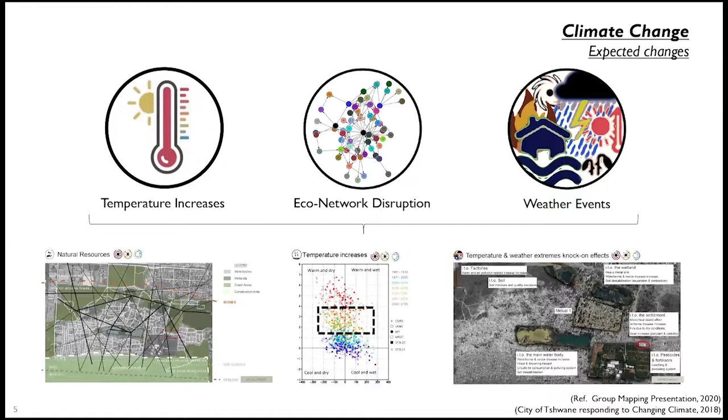Melusi is a rapidly expanding and developing peri-urban informal settlement located about 30 minutes west of Pretoria. We started by analyzing the climate changes expected in Tshwane and Melusi and found that an increase in temperature, weather events, and eco-network disruptions are the primary changes we can anticipate. These changes become vulnerabilities when combined with the current characteristics and vulnerabilities of Melusi, such as the construction methods used or the lack of formal services.

Based on these characteristics and expected changes, 6 climate risks were identified which I believe are particularly urgent to adapt to. Through our group mapping, we measured vulnerability using exposure, sensitivity, and adaptive capacity as indicators, of which I will be focusing on the latter two for this project.

Specifically, I hope to reduce sensitivity by investigating appropriate ways to moderate climate changes while seeing how these options can work together to optimize their impact. I also hope to increase adaptive capacity by investigating mindsets that encourage sustainable equilibrium as a means of becoming resilient, which is where I believe the real challenge lies.

In order to do this, we need to turn to nature for guidance. While investigating this concept, I encountered 3 incarnations of this kind of thinking. The first is bionics, which is copying nature in a mechanical way. The second is biomimicry, but many sources suggest that this is actually greenwash, as it relies on taking the technology of nature and appropriating it to our needs, regardless of the original context.

This brings me to ecomimicry, which refers to trying to understand the intrinsic logic of nature, specifically how and why nature organizes itself in certain ways, with the ultimate intention being to understand how we can adapt our systems using this logic. This is also the theoretical framework I used going forward.

Based on the literature I reviewed, I derived 7 principles that to me encapsulate ecomimicry's intentions and parameters. These underpin my design product and the design process, as this project to me was an investigation into how ecomimicry can be applied as a way of thinking when working towards climate adaptation.

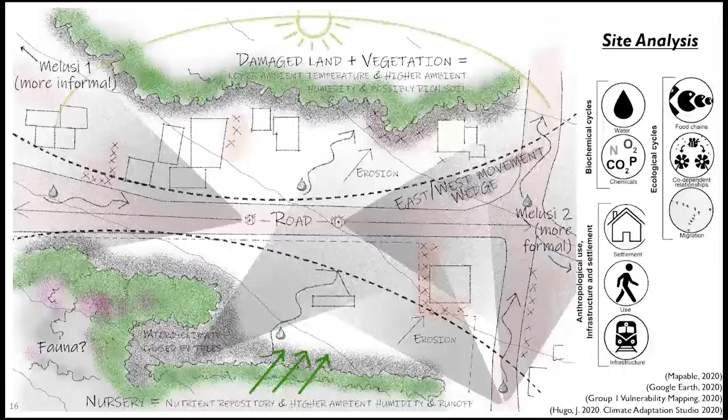The first step in identifying opportunities for this entailed understanding the site and brief. For the former, this included mapping environmental characteristics and cycles, the way people interact with the site, and how these factors affect each other. Similarly, the brief from the COPC was reviewed in order to understand what they and the community need this project to be, which led me to electing healing and knowledge management as my primary programs.

I also expand the clinic to include mental and emotional healing, and for knowledge management I note that it is indeed important to teach a person to fish, but it is also important that they have access to bait and tackle afterwards, otherwise their learning will be lost. Thus, both phases of learning need to be accommodated.

When these two fields intersect, one also unlocks the option of helping community members reach and continuously maintain healthy lifestyles, which is a key factor in reducing climate vulnerability. Similarly, both healing and knowledge management are crucial factors when trying to address the climate risks threatening Melusi.

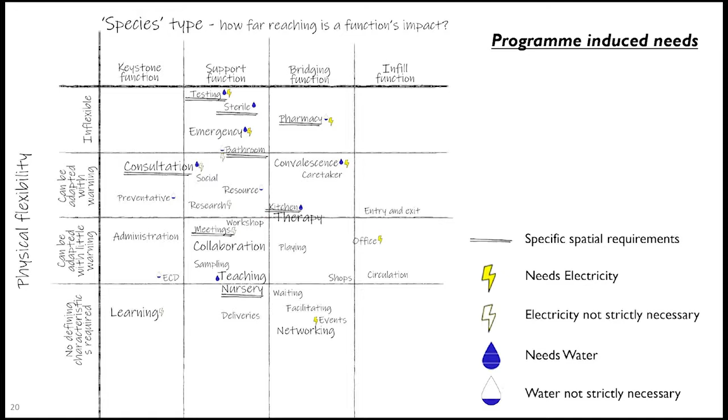Here we find our first opportunity for eco-mimicry. By considering the programmatic functions as components in an ecosystem, it enables us to identify the roles they play and what they need, contribute, or detract from the system in order for the whole to function coherently.

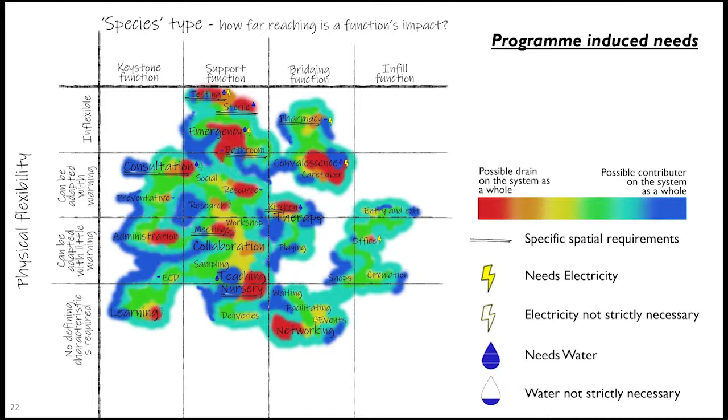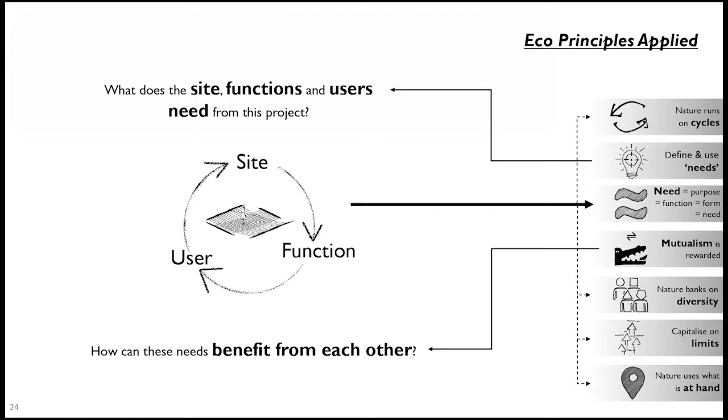But in order for this to manifest on site, they need to be overlaid with systems already present there. Thus, guided by the eco principles, I ask, what does the site, functions, and users need from this project, and how can these benefit from each other?

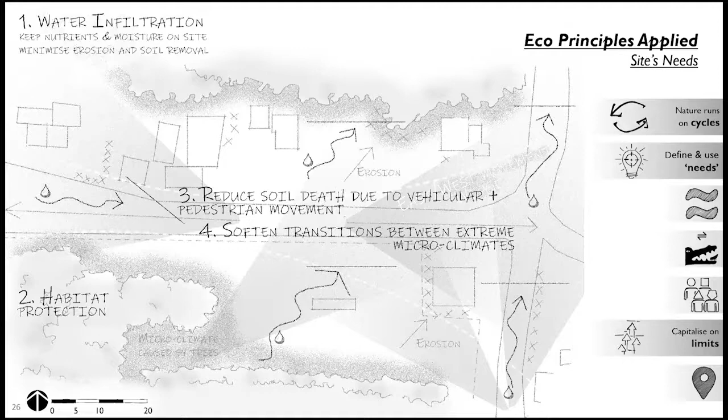We start off with the site characteristics that need to be responded to before identifying the core site needs, which rely on allowing ecological cycles to function uninhibitedly.

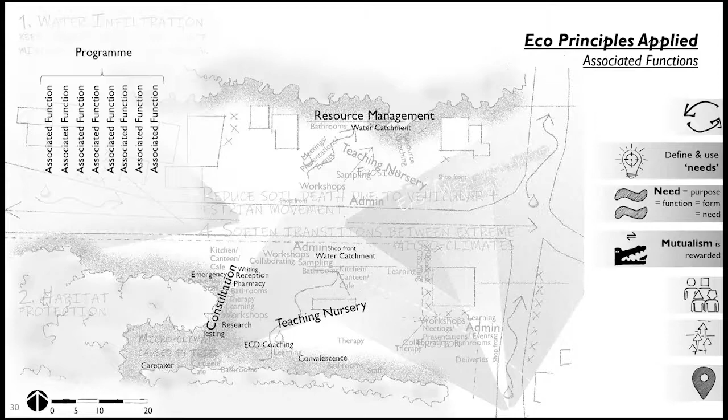But what could a function benefit from being on a specific spot on the site and vice versa? Some mutualisms are more advantageous or singular than others, and they in turn have knock-on implications on the rest of the system, which can be a result of shared needs, codependencies, or mutualisms in their own capacity.

In this context, an example would be the functions that require specific services. One is then left to contemplate functions that are flexible both spatially and relationally. As such, there are several options in terms of how the remainder of the site can be populated.

For the purpose of this project, I elected the indicated option as I feel it best addresses the current needs, risks, and opportunities, but this inherent flexibility was kept in mind for latter parts of the project in order to increase adaptive capacity.

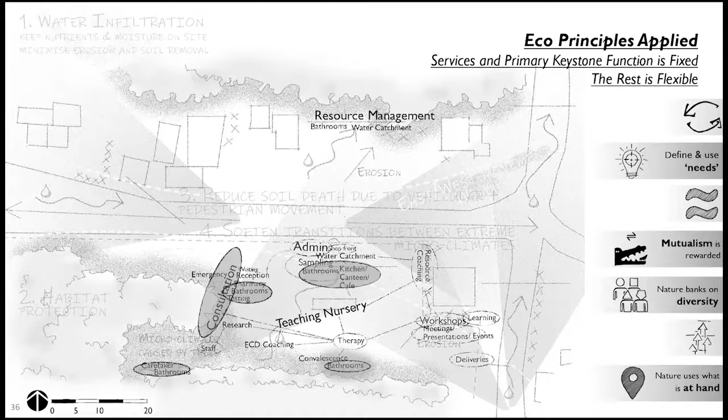Only the service clusters and the keystone function are fixed, with all other spaces being flexible. I propose to achieve this with modularity of materials and techniques.

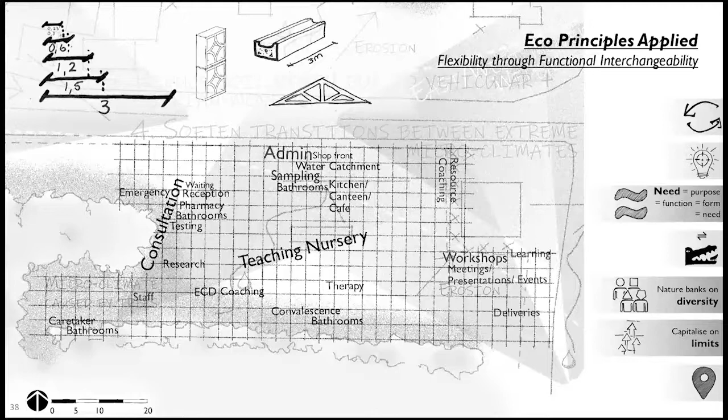The 3 by 3 meter grid was selected for its near universality as a module and its advantages in terms of solar exposure, which was also a key factor in electing north-facing massing. This also suited the site shape and edge condition.

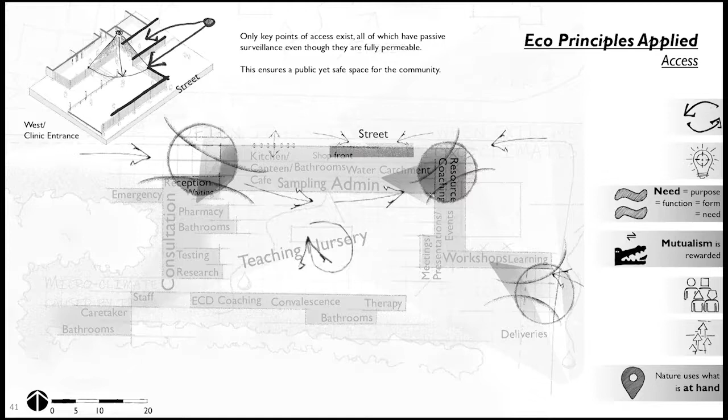Turning to the user's needs: firstly, this needs to be a safe yet public space for the community. Thus, passive access control was needed and achieved by nesting entrances between functions. These entrances also streamline movement so users can wander into the building and determine their own level of interaction.

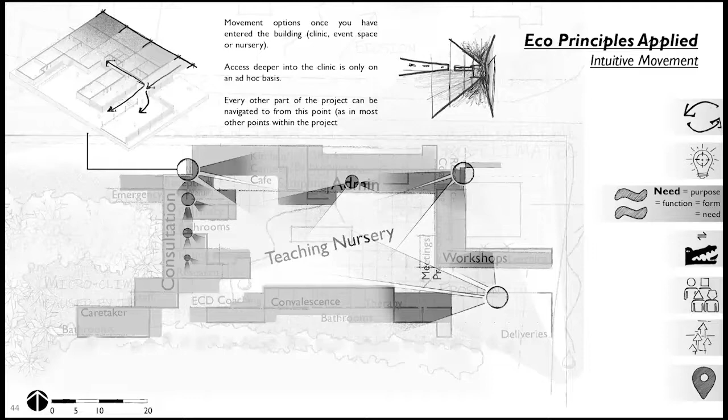Spaces need to conform to their legislative spatial requirements. Intuitive movement is another factor, and by using the courtyard typology, wayfinding complications are minimized since the major functions are consistently visible. Progress deeper into the buildings would only ever be on an ad hoc basis, increasing privacy as you progress. Thresholds soften the transition between outside and inside, or help define different levels of privacy.

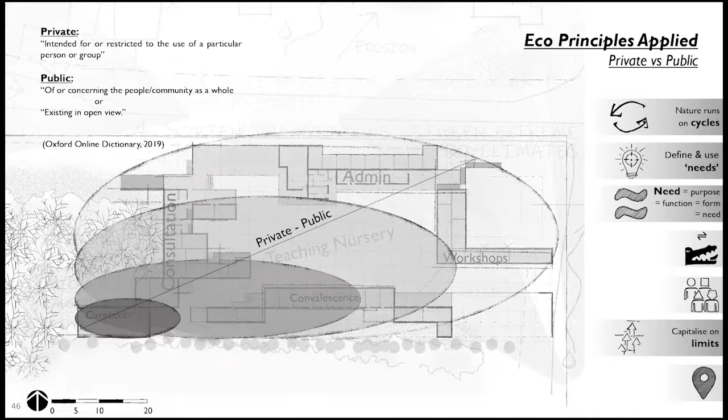This brings me to a duality I found particularly interesting and important: the contrast between private and privacy, or public and exposure. This hub is intended as a public community space, but it contains zones that inherently require privacy and an impression of safety. Both needs must be kept in balance.

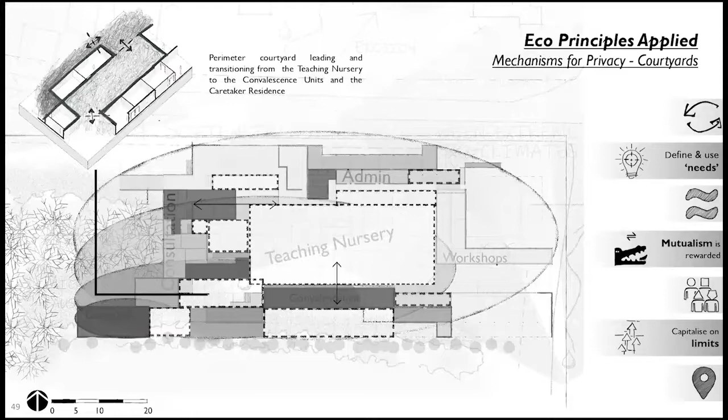I attempted to balance this by having the main and perimeter courtyards define transitional and privacy hierarchies. This is reinforced by thresholds, materials, and level differences, informed by site needs outlined earlier. Minimizing soil death and being ecologically permeable were two needs I addressed.

I addressed this by raising the building off the ground and using pin foundation systems. This is also advantageous as the site has a slope that would have required cut and fill otherwise. It also provided an interesting space-making tool and visual language for the project.

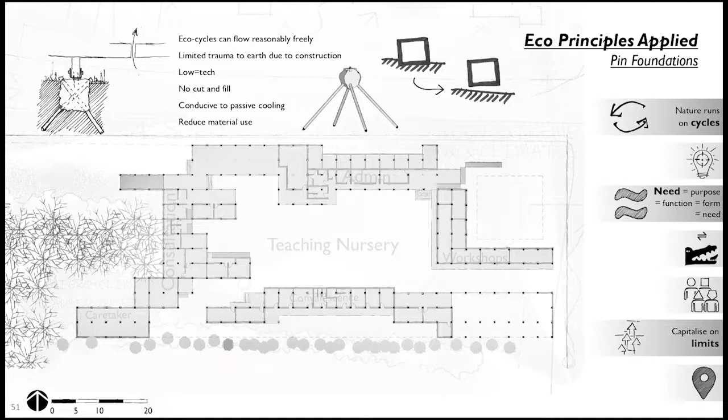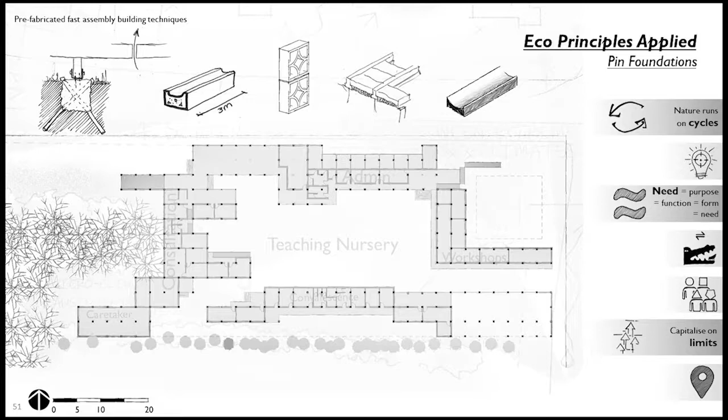I also endeavored to use techniques and materials that were mostly prefabricated while also being low-tech and standardized, in an attempt to future-proof the project. The last consideration was to minimize dependency on formal service provision, achieved by making the building largely passive and limiting required services as much as possible.

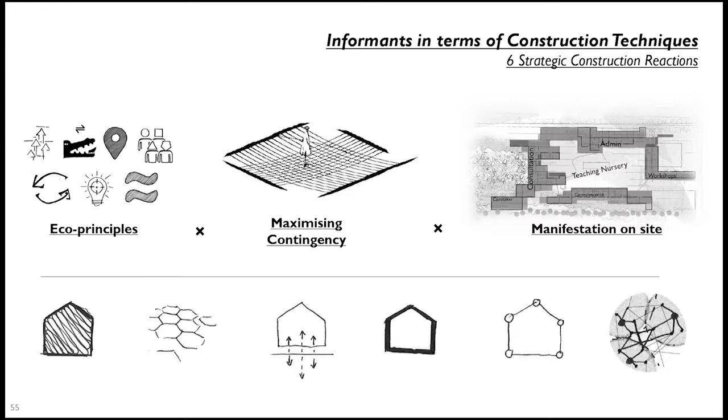Collectively, all of these considerations manifested in the building shown. I believe the considerations and resultant building can be summarized in 6 strategic reactions, all of which increase contingency through the principles of eco-mimicry and thus increase resilience. I'll illustrate how these reactions come together spatially with 3 example zones.

First is the consultation area. Nowhere else is a public-privacy duality as striking, and one can see how breeze blocks, level differences, windows, and thresholds act to ensure privacy while not alienating possible visitors.

These devices have a dual function in increasing the passive performance of the building, securing the perimeter, creating niche microclimates, or defining a visual language for the project, making it an ideal example of a high contingency system—multiple factors contribute to the same goal, but all factors also have multiple goals, making the network as a whole more resilient.

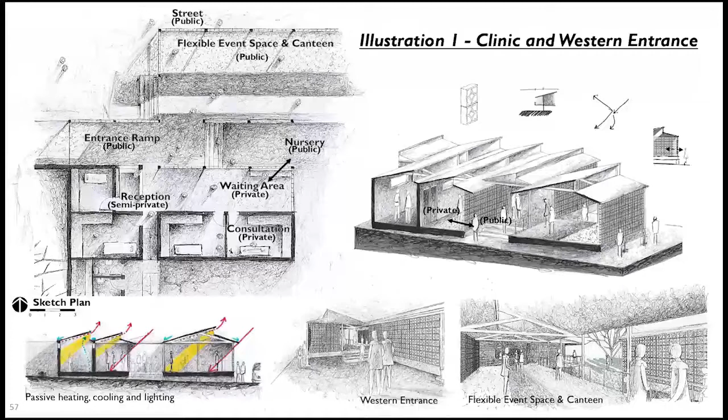Second is the administration block. Here one can see the public street edge being used to house shops or workshops, which act as an extension of the learning taking place inside.

While on the external walkway, most of the site is visible, and the threshold between inside and outside can clearly be experienced here. Modularity and flexibility are also evident in this zone.

As noted previously, I elected this functional layout as I felt it best catered for current needs. However, if these needs change, the spaces provided are versatile enough to be adapted without changing anything structurally. If structural expansion was required, the modularity and low-tech construction would make this viable as well.

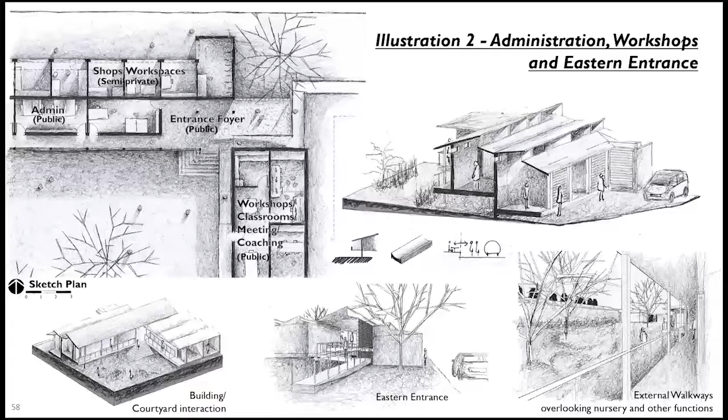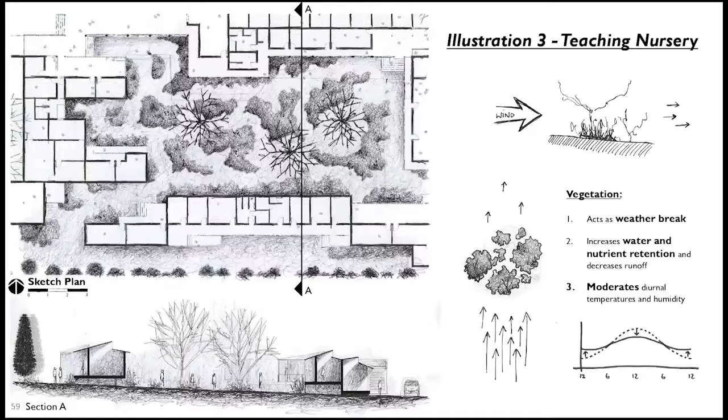Thirdly is the teaching nursery, which contains a variety of microclimates conducive to different uses and plant life. In addition to its functional role, the nursery fulfills several eco-roles such as increasing water and nutrient retention, biological diversity, microhabitats, acting as weather breaks, and moderating temperature and humidity.

I do not intend for the nursery to be a space for urban agriculture, as that's not reasonable to expect from a nursery of this size. Rather, the worth of the nursery lies in teaching the community about the environment and about caring for plants.

Secondly, I feel there is great value in allowing people to interact with and possibly form attachment to the environment through something like this nursery, as I feel this is a vital step towards true resilience.

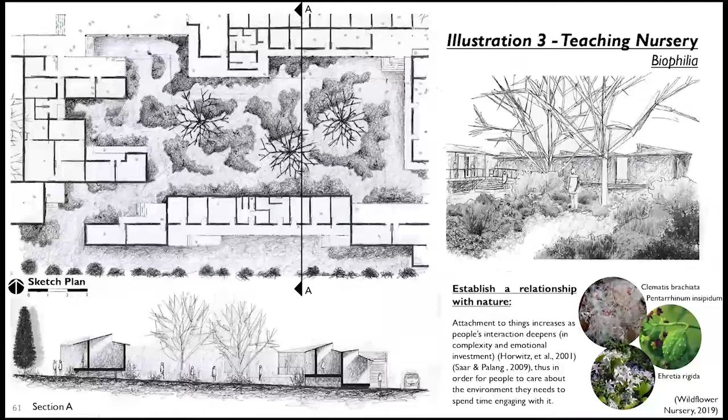Thirdly, while we may not be able to address food security directly, the nursery can be used to study plants and thus provide new information that may indirectly address food-related vulnerabilities.

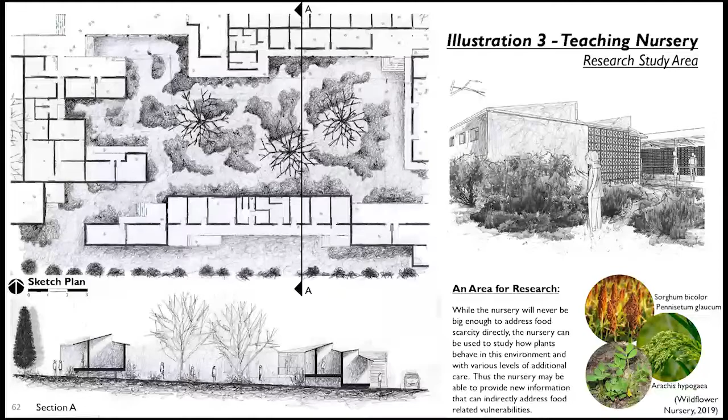Lastly, I speculate on how this project might develop further to decrease climate vulnerability. This includes the hope that the community would be able to emulate feasible building techniques, as well as the possibility of the hub expanding—one possible outcome being to apply the idea of eco-mimicry across Melusi to increase the area's network resilience and adaptive capacity.

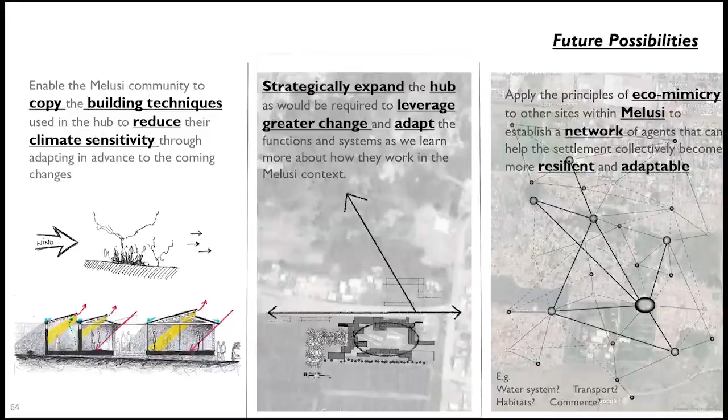In conclusion, I intended to investigate and provide the community with tools and techniques, both literal and abstract, that can be used to decrease vulnerability and adapt to the coming changes.

I also believe eco-mimicry can be a great tool in changing the way we think and ultimately achieving resilient, stable networks that rely on mutualism and contingency. This is especially true in communities such as Melusi, where a small shift towards ecological thinking can have a major impact on the community's ability to adapt and flourish.